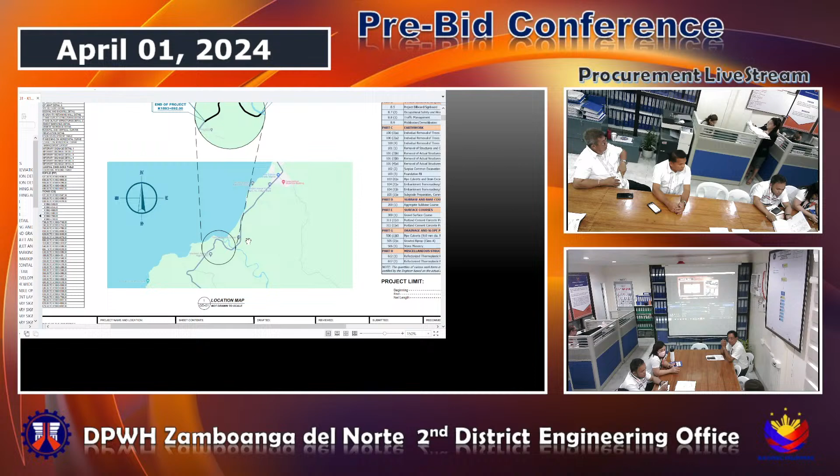So we have here road widening, Dipolog-Sindangan-Liloy Road, 1892+531 to 1893+892. This is the location map of the project. The beginning of the project is at abutment B of Punot Tapo, to 1892+531.

For the typical section, we have a road widening of a minimum of 3.35 meters. All in all, for 2 lanes, it will be 6.7. For 4 lanes, it is 13.4 meters, with a bike lane of 1.5 and a shoulder of 2.5 meters. Okay, next.

For the PCCP, we will be using 280 mm thick PCCP. For the transverse bars, we will be using 36 mm by 600 mm dowel bars. For the longitudinal bars, we'll be using 16 mm deformed tie bars, 600 mm in length. For the bike lane, it will be 230 mm in thickness, using 28 mm by 600 mm dowel bars, plain bar. The same with the tie bar, 16 mm diameter deformed tie bar by 600 mm, spaced at 750 mm on center.

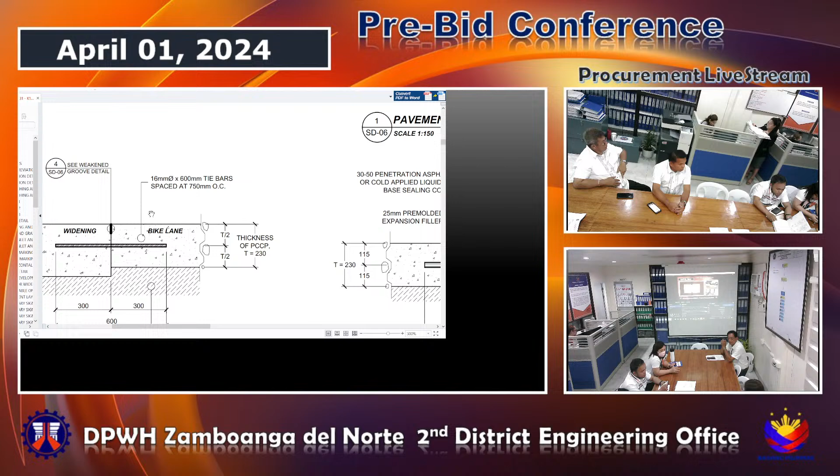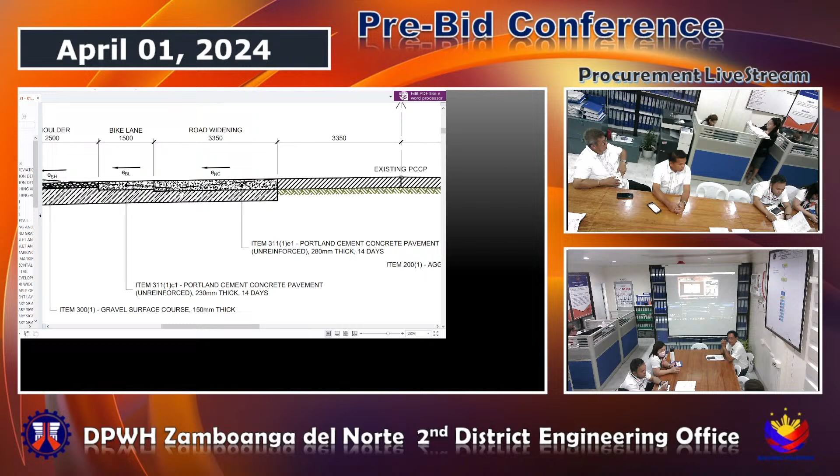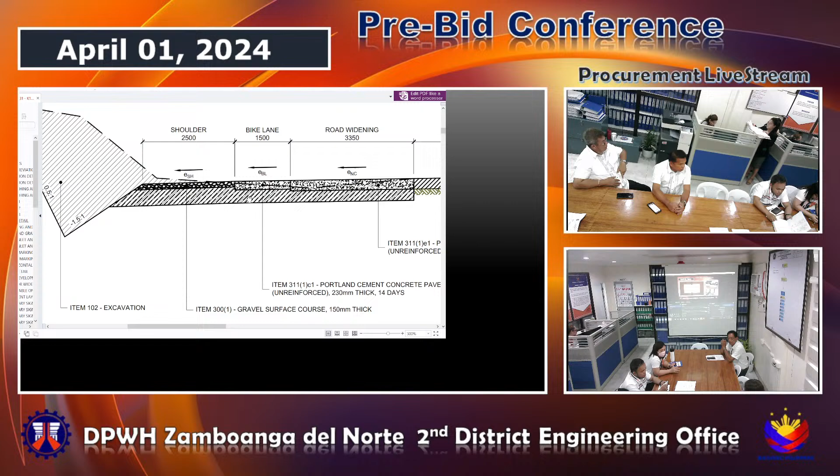For the sub base, all sub base are 300 mm in thickness. And then for our shoulder, we'll be using Item 300(1) of 150 mm thick gravel surface course. There are also provisions for construction of roadside protections, grouted riprap Class B, and then retaining walls.

Now, you can see the schedules of these structures, including the drainage structures, inlet and outlet headwalls, catch basins, and others, inlet and outlet structures. Also, there is a provision of installation of pavement markings, including the white and yellow pavement markings.

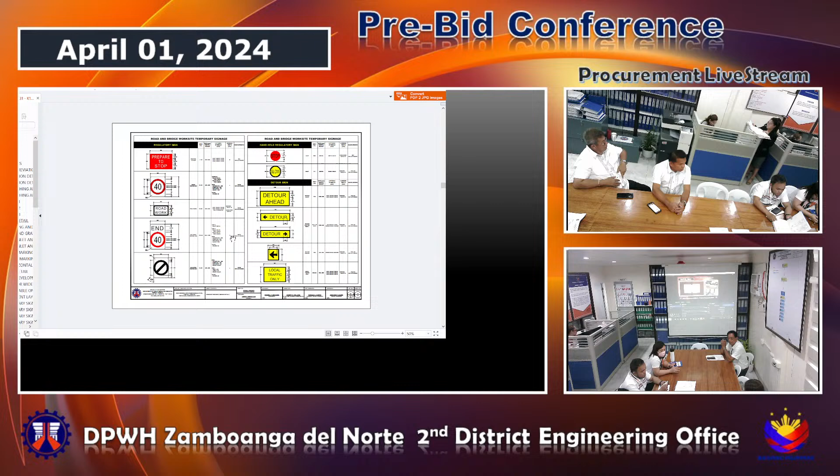And of course, for this project, there should be a traffic management. So this is the typical layout for the traffic management. So for the detailed discussion of the next project, I will call Engineer John Roger Logo for 24JC 0050.

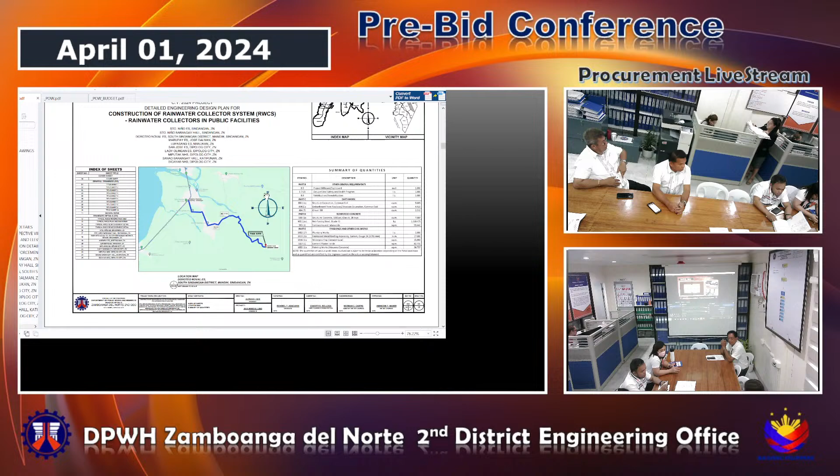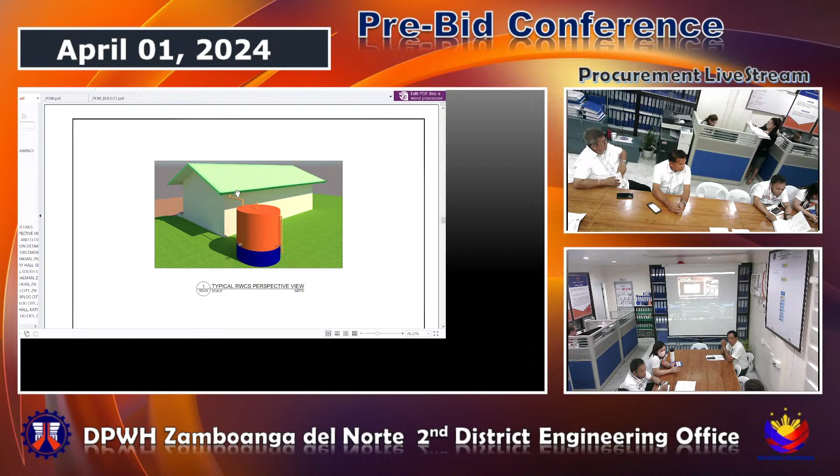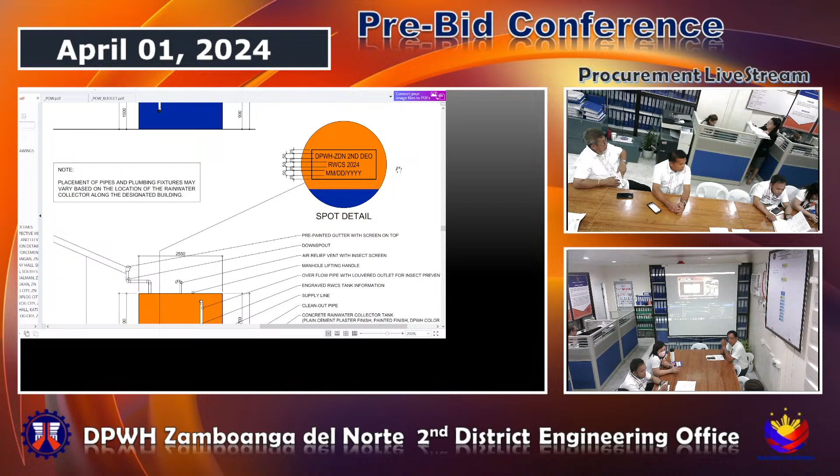Concrete ni siya sir. This is the perspective view of the typical rainwater collector system, with the DPWH color scheme. So we added, for the DPWH color scheme, an engraved information: DPWH ZDN Second DEO RWCS 2024, then year, date completed.

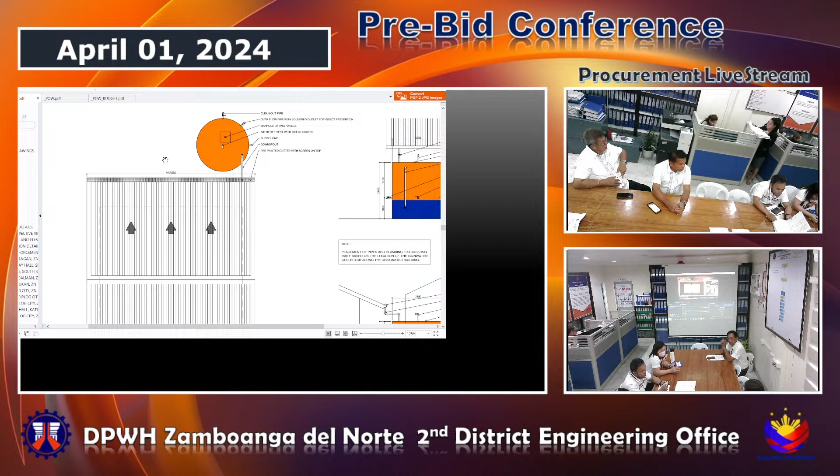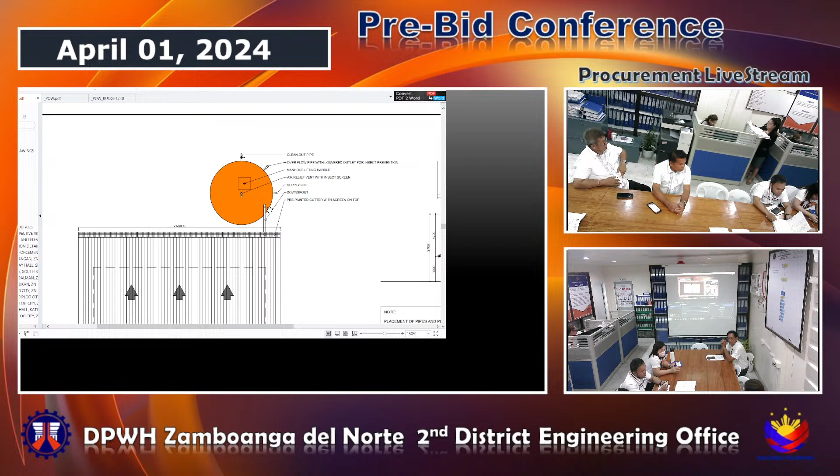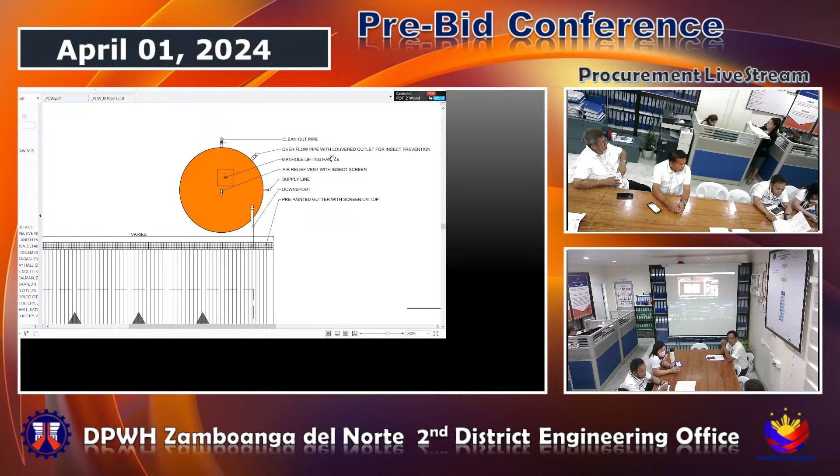So for the typical plan, we have here the roof slope, so we'll be collecting the rainwater. We have a pre-painted gutter with screen on top, then the downspout, the supply line, an air relief vent with insect screen, and a manhole, an overflow pipe with louvered outlet for insect prevention. Then we have the clean out pipe.

So this is the elevation. We have here the pre-painted gutter and downspout, air relief vent, the overflow pipe, the engraved information and the supply line, the clean out pipe for maintenance, manhole, overflow pipe, and this is a concrete rainwater collector, plain cement plaster finish, painted finish with the DPWH color scheme.

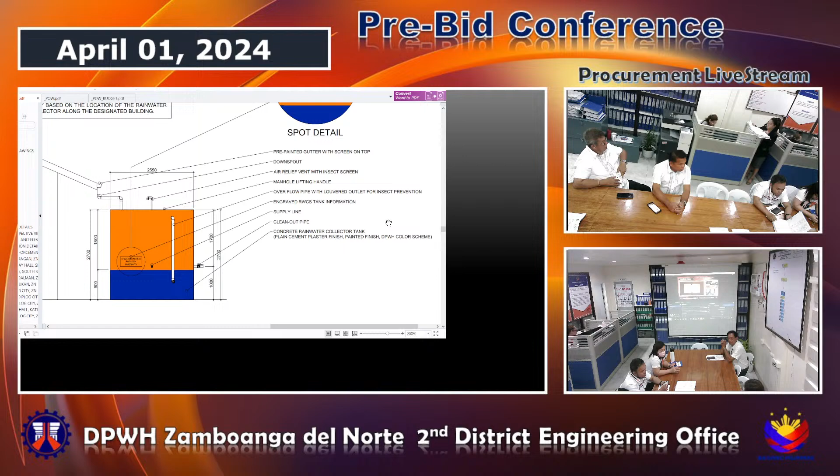So for its cross section, just refer to the typical rainwater collector system section detail for the sizes of the pipes and other fixtures used. So for its structural detail, for its foundation, we'll be using 16 millimeter radial bars spaced at 300 mm center, measured outside.

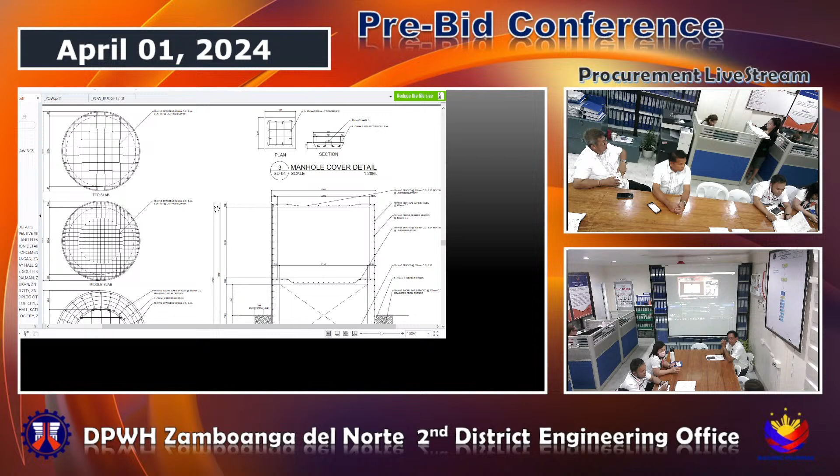Then for its walls, at the bottom, we have a thickness of 200 millimeters. Then at the top, at the rainwater storage, we have a 150 millimeter thickness. Then the bottom slab, we have a 200 millimeter thickness, then the mid slab of 150, then the suspended top slab of 100 mm. For its reinforcement details, just refer to the reinforcement details here. We'll be using grade 40 for all bar sizes.

For the typical detail of the specific section, just refer to the plan. So we have two barangay hall locations, at Santo Niño and at Sanao, Katipunan. At the existing site, we don't have a fascia frame, so we'll be adding fascia frames on both locations. For the fascia detail, just refer to the plan.

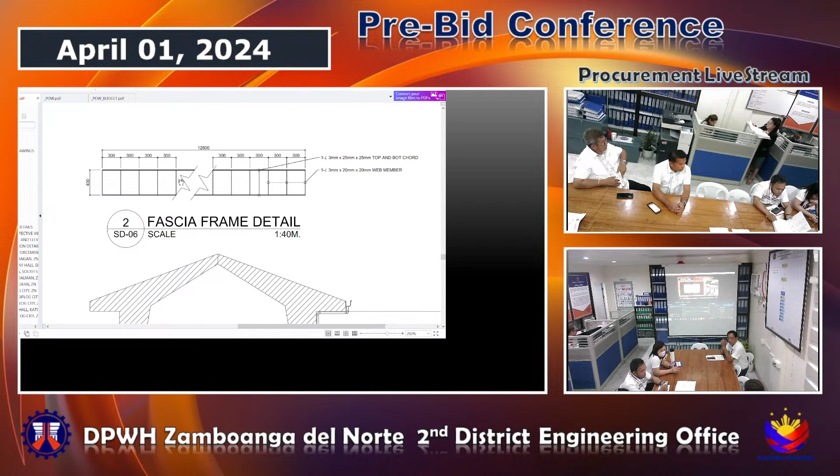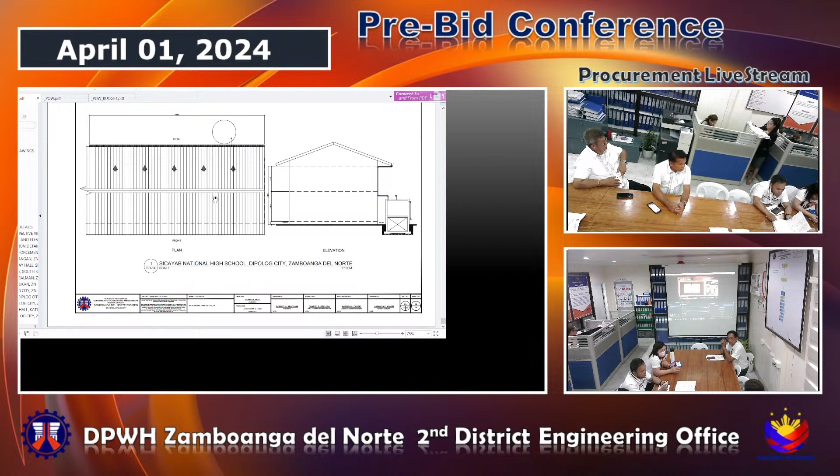So I think that's all for the rainwater collector system. Okay, thank you, Engineer Logo.

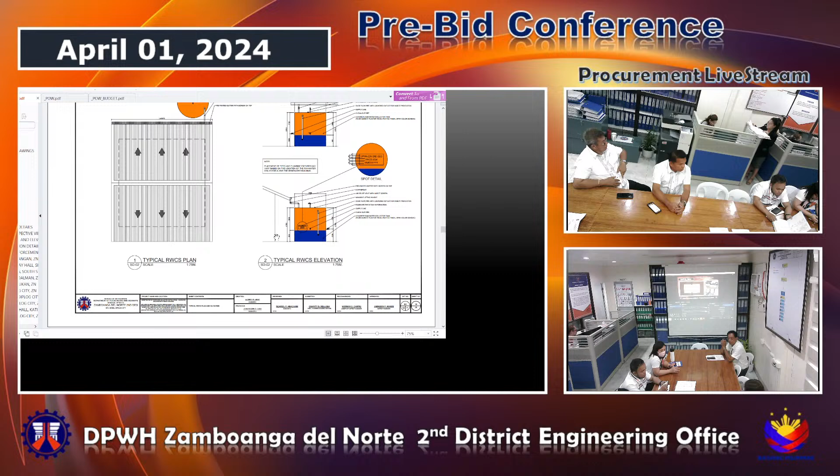So to continue with our discussion, we would like to request Architect Cristito Bungkasan from the Planning and Design section to discuss the next project. Can I clarify something regarding the water project, Madam Chair? After your presentation, sir. We will discuss all the basic contract data of contract IDs 24JZ0037, 24JZ0050, and 51, and then we will move on to the open forum.

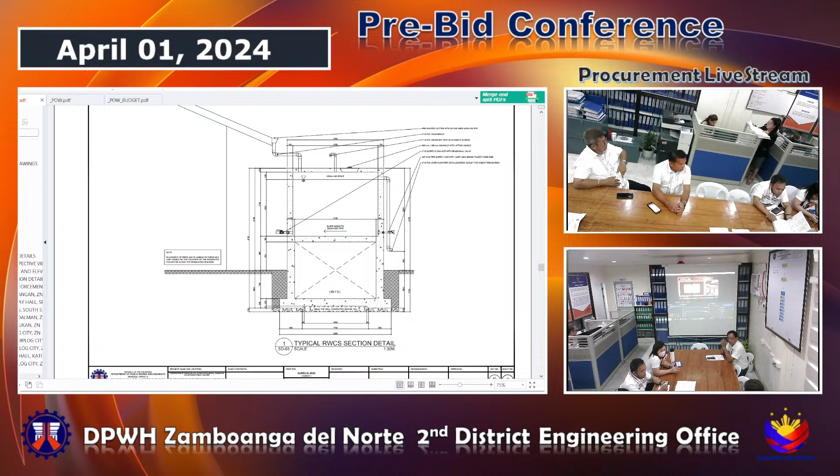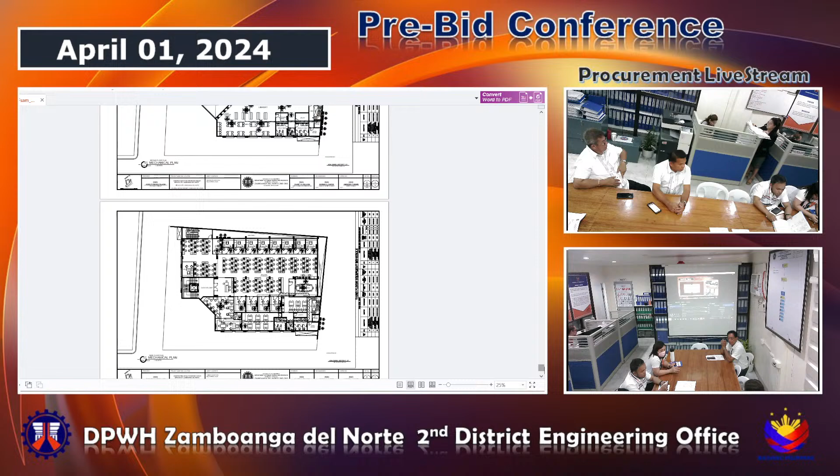So the project is construction of a multi-purpose facility. The province is Norte with the amount of 10 million. Before I continue, Madam Chair, I would like to recall that last year, fiscal year 2023, in the annual infrastructure program based on the approved fiscal year 2023 Appropriation Act, Republic Act 11936, in this listing,

there were 4 projects included in this listing, Madam Chair. Those four projects comprised only one building, and that is our ongoing legislative building. One of the projects is 15 million. Then we have 20 million and another 20 million. Then the last one is 15 million. But unfortunately, the 15 million was gone, nawala siya ba.

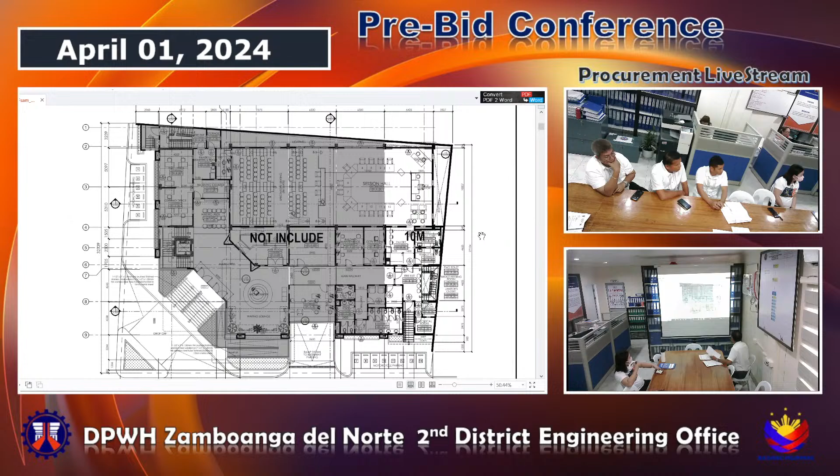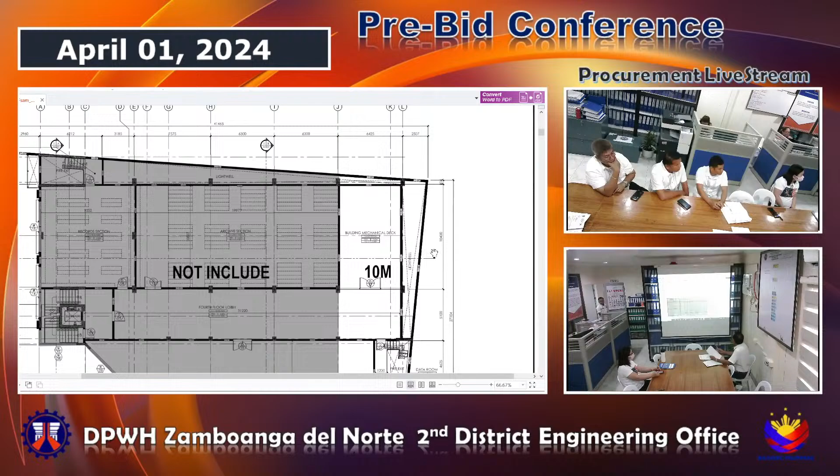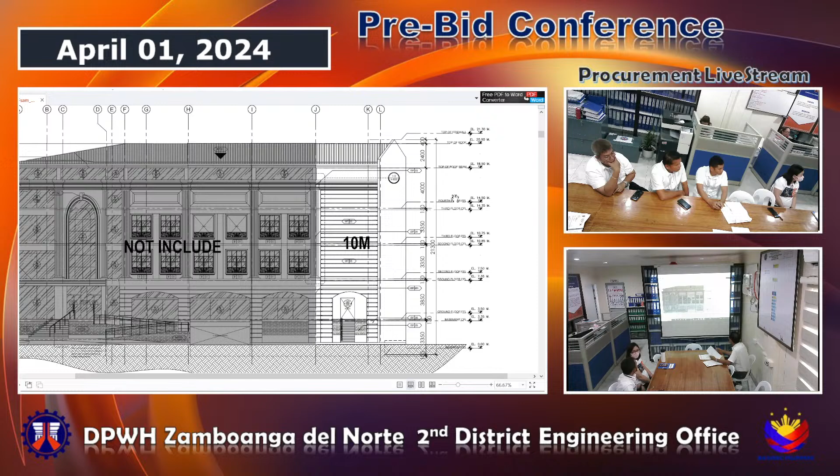and so forth. And then second floor, part sa atong atrium nga open na siya down to sa atuang session hall. Then we have the exit stair. Then we have also the female toilet. Next, the elevation, this is the elevation for the 10 million. Maklaro nato dito sa scope of work unsa ang atong 10 million. So let us proceed to our scope of work or the program of work of the project.

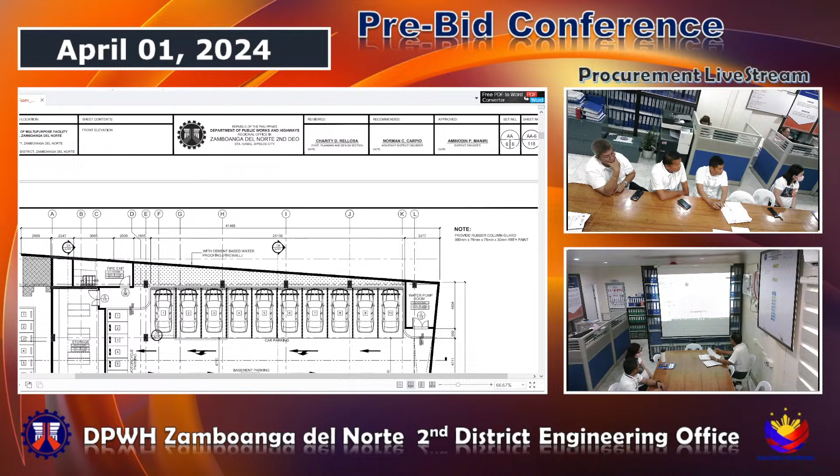So our scope of work: structure excavation, covering fill, structural concrete, footing, then the beam, grade beam, and all of the plumbing works and electrical works are rough-in only. So from the basement foundation up to roofing, that is included in our 10 million, the structural concrete including the roofing. I think the details of the plan and design and our scope of work and program of work will be discussed at the pre-construction conference, Madam Chair. That's all, Madam Chair.

Thank you, Architect Bukasan. And now moving forward, we would like to request the head of the BAC Technical Working Group, Engineer Ronville Abakahin, for the presentation of the eligibility requirements and the technical and financial components of the contracts to be bid. Okay, for the continuation of the discussion, we have here the eligibility requirements. First is the registration in the civil works application. Contractors not yet registered are encouraged to register for electronic eligibility checking. They can register anytime at the procurement service of the DPWH.

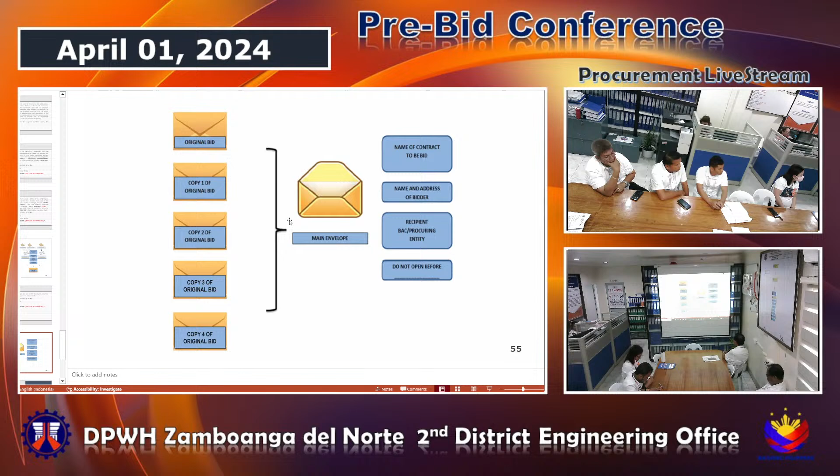So, for the bid evaluation, for the completeness of bid, bids not addressing or providing all the required items in the bill of quantity shall be considered non-responsive and therefore shall be automatically disqualified. And where a required item is provided but no price indicated, it shall be considered non-responsive. However, if the bidder specifies a zero or a dash, then it would mean it would be offered to the

government for free. Okay? For arithmetical corrections, bid price in figures versus in words, bid price in figures shall prevail. Total price per item and unit price versus unit price for the item multiplied by the quantity of that item, the latter shall prevail. So, meaning unit price for the item multiplied by the quantity of that item shall prevail. Stated total price and the actual sum of prices of component items, the latter shall prevail.

And unit price in the detailed estimate and unit cost in the bill of quantities, the unit cost of the bill of quantities shall prevail. Discrepancy between the original and the copies, the original shall prevail. So I guess that's all, Madam Chair, for the discussion of the documentary requirements for the bid.

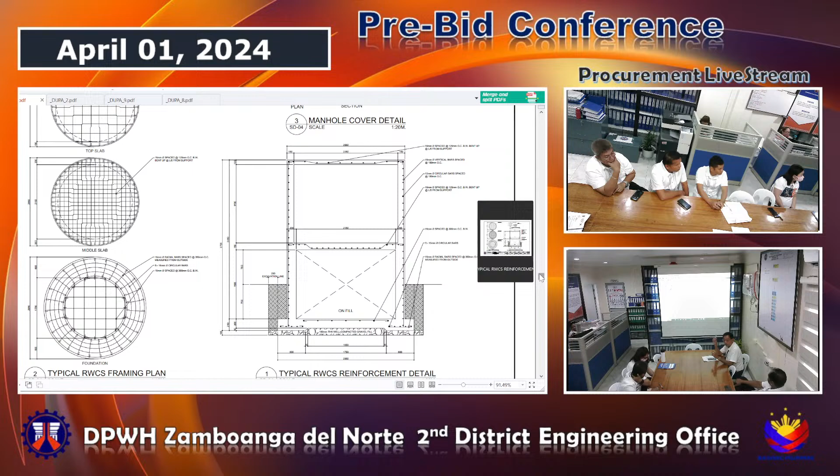Second is the calendar days. As we notice, there are 10 locations at 21 calendar days each location of project. And total of calendar days is 210. That is 7 months for this kind of project.